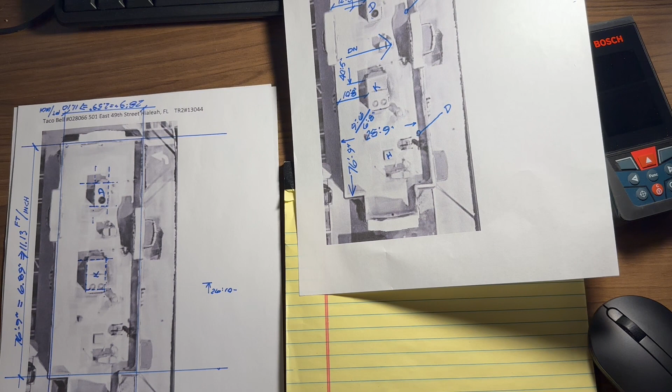Okay, now we're going to continue with the framing plan and locate the trusses that are actually physically supporting both of our units, the kitchen and the dining. You can start with either one. On this job, we started with the kitchen unit, and I'll walk you through the exact procedure we did. I have some field notes on the side, so I'm basically going to reproduce those and talk you through how we actually did it. So I'm going to start with the kitchen unit.

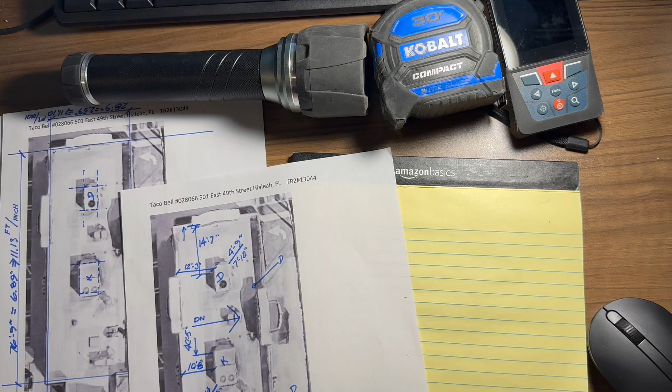I am now inside the kitchen, looking around, trying to figure out where to place my ladder, because I'm going to have to get up on the ladder, open the ceiling, poke through with a flashlight, tape measure, laser, and a pad of paper, and start observing, measuring, and taking notes.

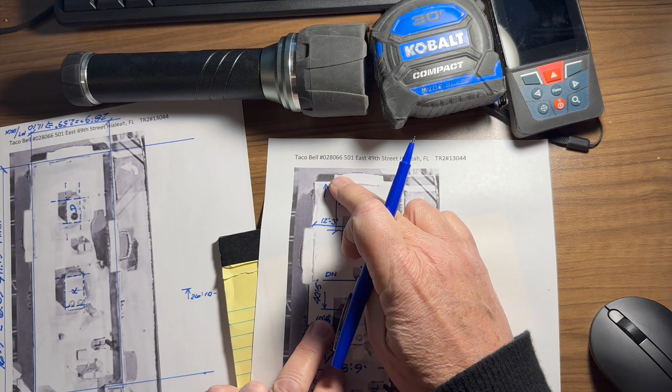Before I poke through the tile, I want to figure out where's a good place to do that. So I want to find the dimension, the location of the edge of this unit from the rear wall. I already did the math here: I took 76'9", the overall building, minus 40'5", minus 9'6", and I came up with 26'10". I made a side note here so I didn't forget it as I'm proceeding.

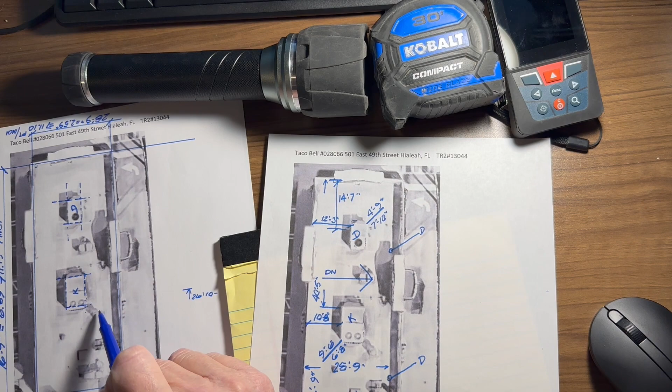So I move my ladder around that area and try to figure out where to place it so I can go up and pop through the tile. I go up and pop through the tile and see what I can see. Sometimes I can't see anything, so I need to move the ladder and find a place where I can see. Finally I get up there, and one of the first things I see is a set of double trusses.

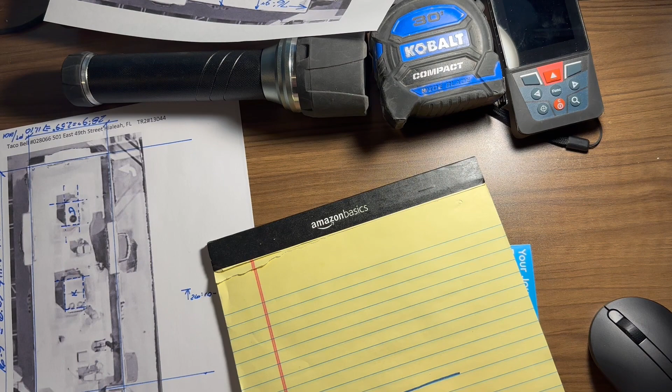I like it when I see double trusses because that carries a lot of weight. So the first thing I do is note a double truss. Then while I'm standing on top of the ladder with all my stuff spread out, I come down a couple steps, and I sketch here something which indicates what I call the rear wall.

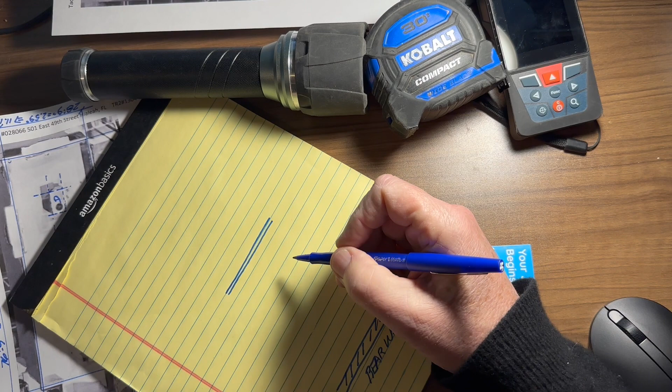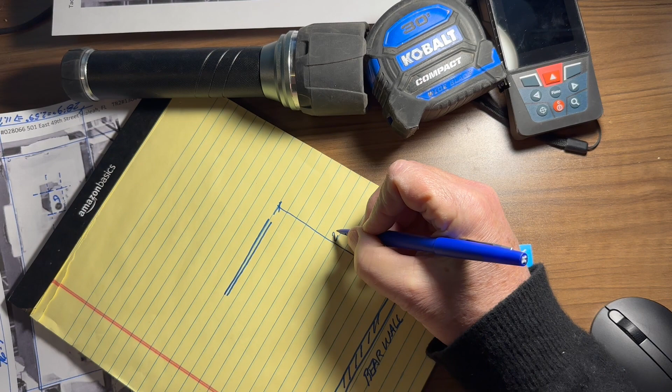While I'm standing a couple steps down, I hold my laser and shoot to the rear wall and make a note that that double truss is basically about 25 foot 4 inches from the rear wall. Now I've begun to figure it out. I'm going to set this stuff aside here.

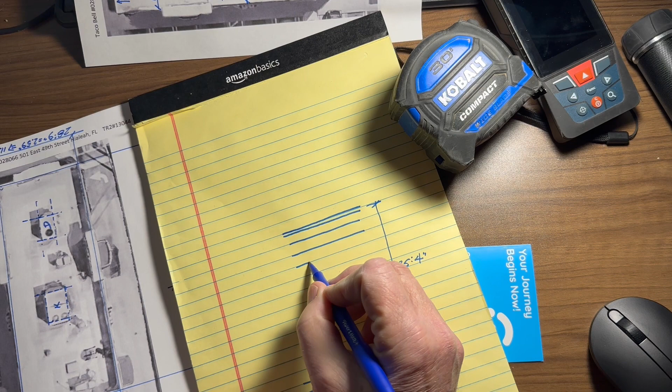Now, when I'm up here, I try to get all the information I can while I'm up here. So I look back towards the rear wall above the ceiling, and I can see a bunch of trusses this way. I measure with my tape measure the first truss, and I find there's one at 24 inches on center. Extend the tape, another at 24, another at 24, and I note 24 inches on center while I'm up on the ladder.

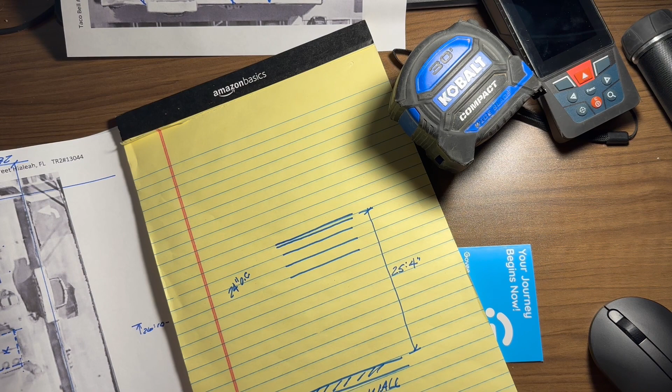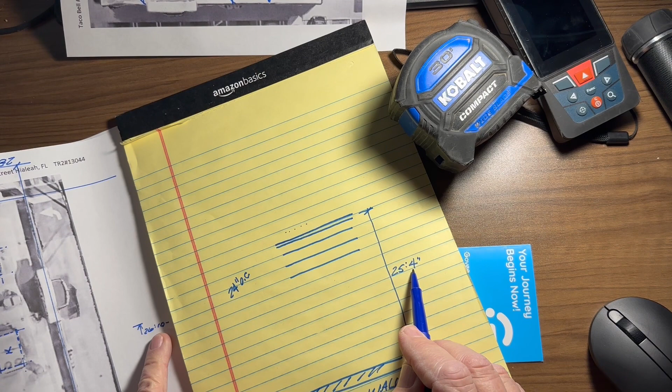Now I know that this is all on this edge of the unit because my unit starts at 26'10". Sometimes you will see down shots, but you're probably not going to see where the edge of that unit is. It's only by your scaled drawings and measured dimensions you're really going to know where the edge of that unit is, okay? So we know the edge of the unit starts somewhere over here at 26'10", and this is 25'4". The unit's going to extend basically 1'6" that way.

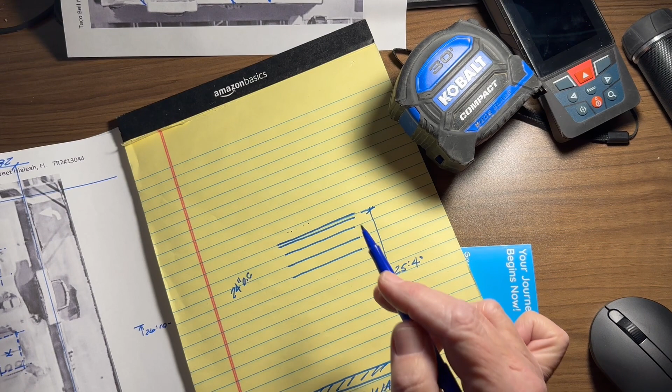So from 10 feet here, I need to know what the trusses are doing for another 10 or 12 or 14 feet this direction. In this particular case, I turned and looked this way, and it looked like there's a bunch of other trusses, similar spacing as these, so I just make a note of how many I can actually see. I don't make any assumptions, okay? I'm noting what I can see.

And I see a truss and a truss and a truss and a truss. And out here at this truss, it looks like another double truss. So I make a note of that, okay?

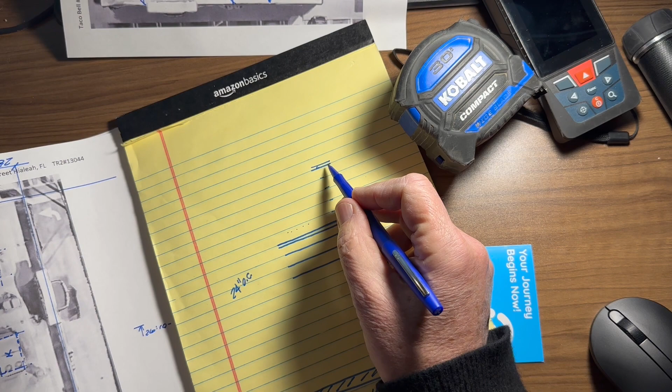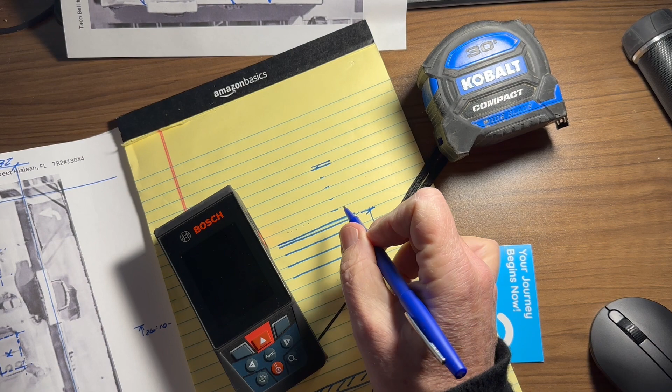Now I'm on my ladder here, I can't see perfectly well where that is. In this case, I remember I took the laser and placed the edge of it on this truss, and I had to wiggle it around, and I was able to shoot to this truss, and I came up with something like 123 inches.

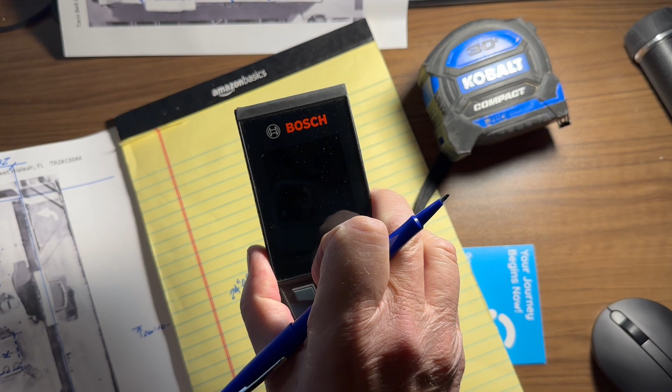Well, I know these are at 2 feet on center, so 2, 4, 6, 8, 10 - I'd expect that to be at 10 feet or 120 inches. I shot it, it was 123, but also my laser was at a cockeyed angle, okay? So I know it was really a little bit less than 123. I'm comfortable it was at 120, so I note it as 120.

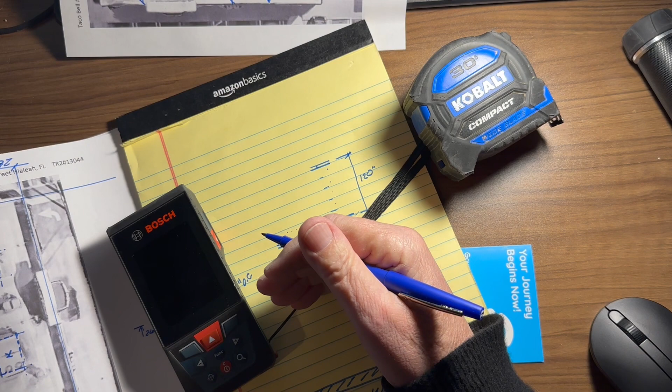Now, one other little notation there: almost always you're going to find trusses spaced at either 12 inches, 16 inches, 24 inches, or 32 inches, or increments of that, because they're normally spaced to work with the standard length of the sheets of plywood that lay on top, which is 96 inches, 8 feet, 96 inches.

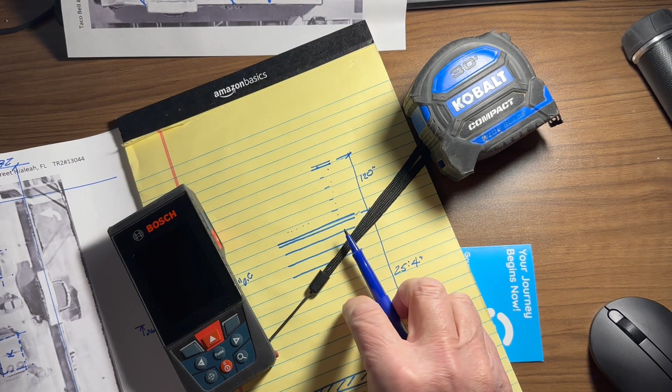So 120 is what I would expect, 5 spaces at 24 inches each. Now, I measured the 120, so I wrote the 120. I observe that these are spaces between and they all look the same, so I'm comfortable indicating them.

While I'm here, I notice there's a down shot between these two trusses, so I indicate it, and another one here between those two trusses, so I indicate it. If I can see where it is, I'll note it. If I can't, I won't. I showed supply return—I couldn't tell which was which, but one was one and the other was the other.

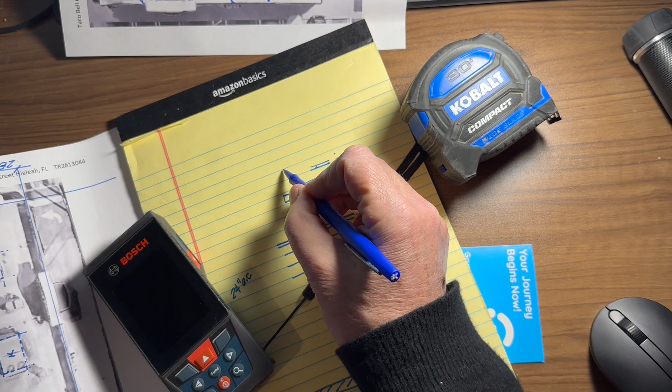Now I still need to get the trusses beyond here, okay? So in this case I had to take my ladder down and go back up here, and I went up here, basically here, and I was able to see 2 more trusses this way, both at 24 inches on center.

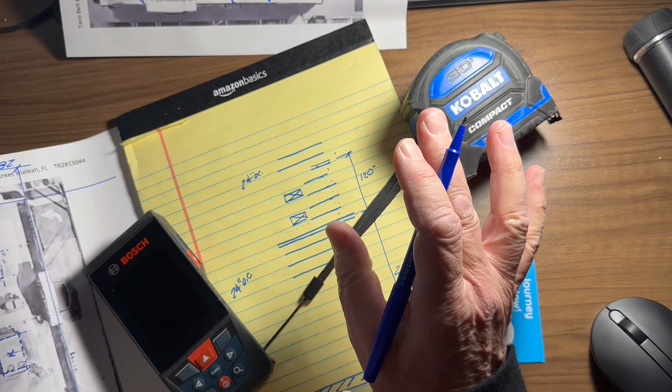And I was able to double check and verify going back this direction. I actually measured my 120 again and just made sure that my little assumption there was accurate. And I saw the trusses and I said, I'm good. So I climbed down off the ladder and went back to my table.

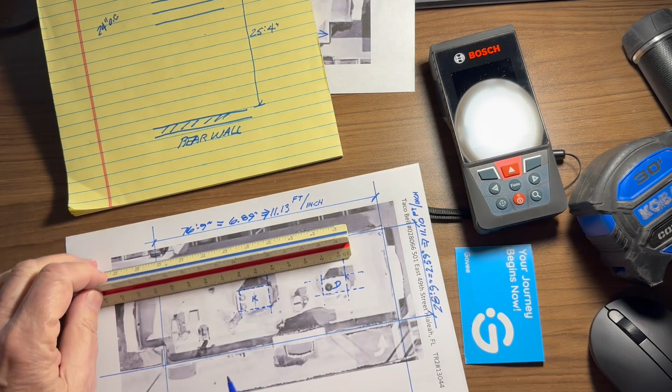Okay, now here at the table we're going to use the scale once again. And here's how we're going to do that. I'm going to use the scale, and I'm now going to draw these trusses to scale on this drawing. First thing I'm going to do is start with my 25'4" and turn the calculator on.

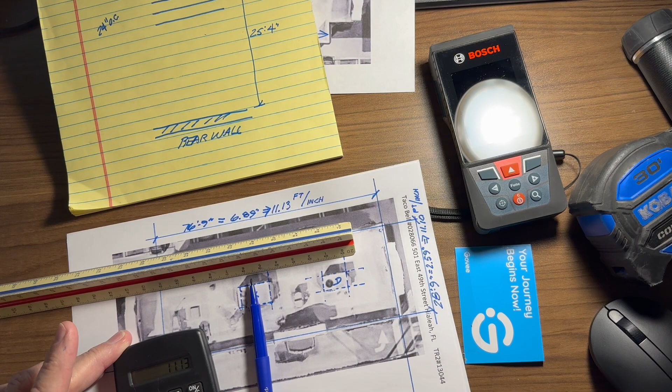25.33 divided by my scale of 11.13 equals 2.27 and something. So I'm going to come here at 2.27, right about there, and I'm going to draw a double truss.

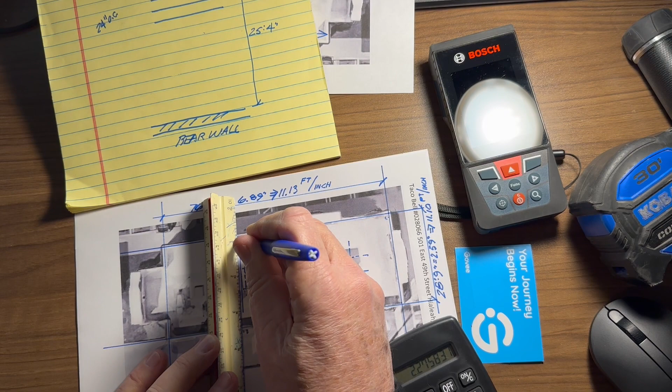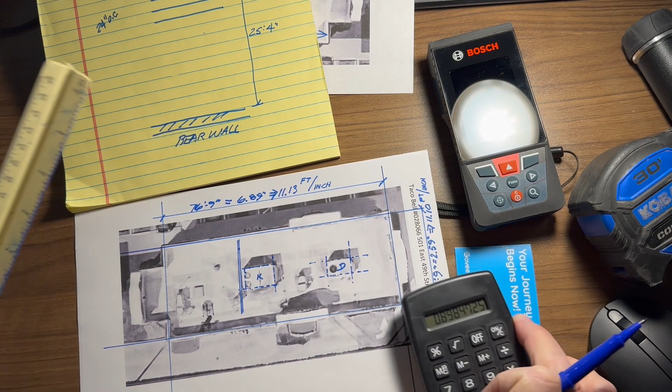Next what I'm going to do is come out here. I could go the very next one, but when you're working with these scales, the longer you can go, the more accurate it stays. I'm going to come out here 10 feet, 10 divided by 11.13 equals 0.898, or 0.9. So I'm going to come out here another 0.9 and indicate another double truss.

Okay, it's looking pretty good. I can see that these doubles are aligning with the kitchen truss, so I'm thinking I've got this thing figured out properly.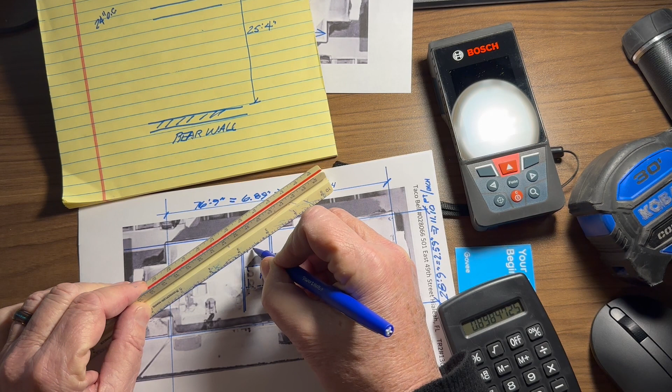So watch this. I'm going to go a tick there, and a tick at the 4, and a tick at the 6, and a tick at the 8. What I'm going to do is get actually kind of tricky, and I'm going to come this way also, because I want to show 1, 2, 3, and then I can go 2 that way also. So I'm going to go 1, 2.

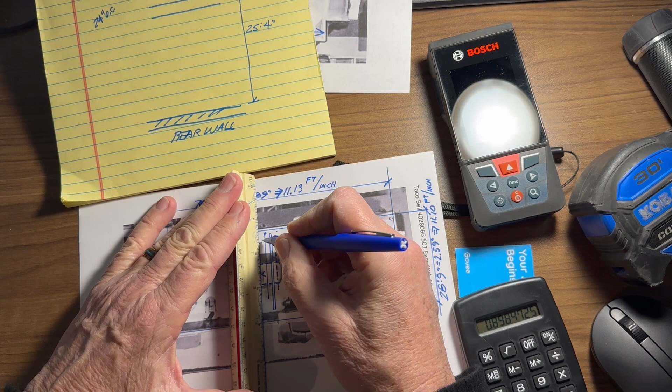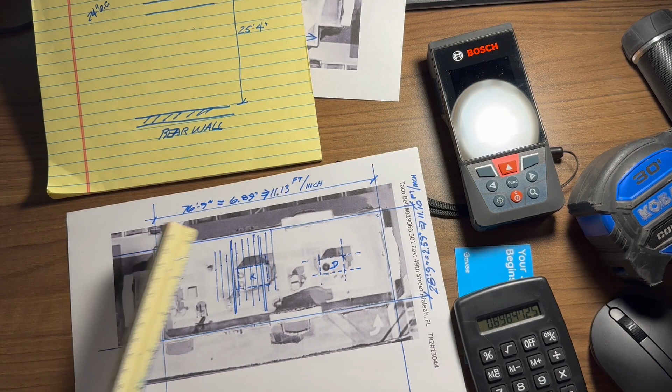Now what happens here is I draw a line on that tick, on that tick, on that tick, on that tick. I have now shown 4 trusses between the doubles, everything at equal spacing. And I'm going to add a line there, line there, line there, line there, line there. I have now shown all the trusses.

The spacing is to scale. The doubles are properly located. And I've shown all the trusses I have physically observed. Everything is to scale and organized on this drawing.

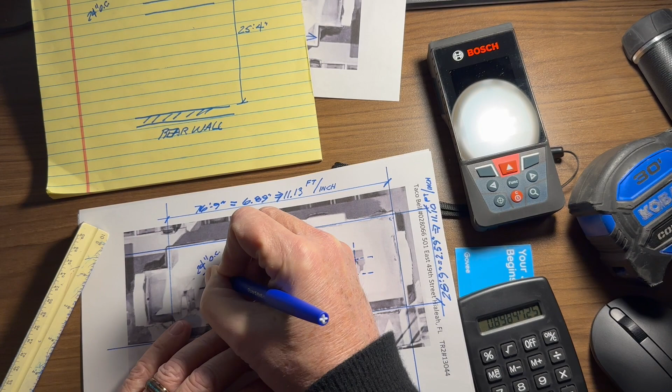Last thing I'm going to do is document on here what I actually physically measured. So I'm going to say 24 inches on center typical. I'm also going to note that there I measured 25 foot 4 inches, and there I measured 10 foot.

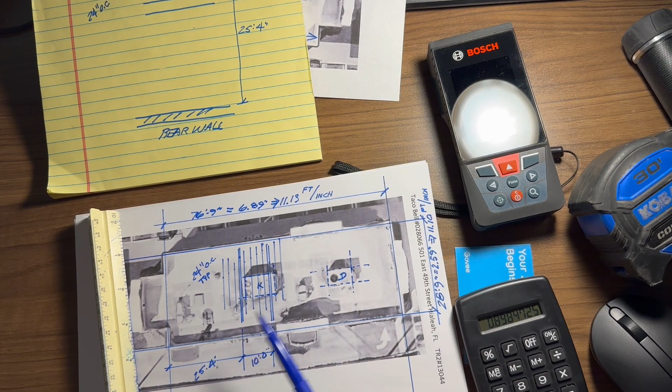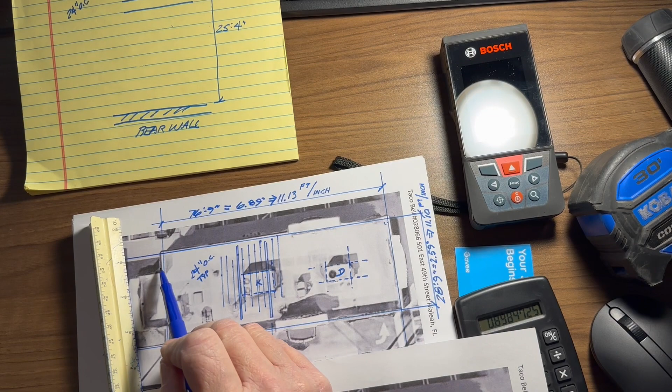Now that gives us, by documenting that, a little bit of room for the engineers to move. What we haven't documented is this: on the rooftop, that inside wall at the back of the store there—let me show that—that wall may be something like 8 inches thick. But here on the ground floor, it may be something like 12 inches thick. So by measuring here and there, etc., things can be off a couple inches. By giving these dimensions, our engineers are going to be able to do some research and figure out what is more appropriate here.

Okay, so now I've done trusses past the edge of the unit. This allows for what we call the tributary area—there's another handout that discusses that. But what we're always looking for is the trusses right up to the edge of the unit plus the truss beyond, same thing both directions.

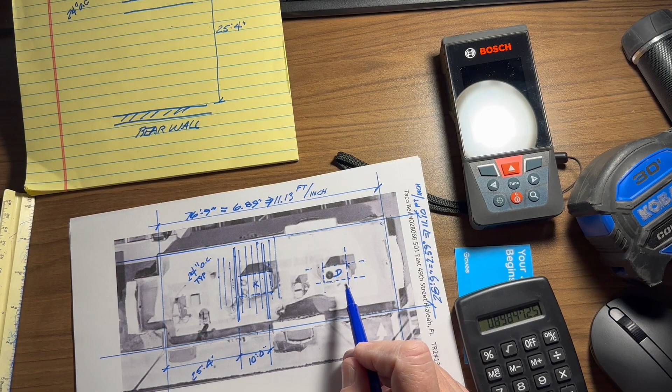The truss is right up to the edge of the unit plus the truss beyond. Because, for example, this double truss here is carrying not only the unit, but it's also carrying half of the weight of the spacing to the next truss. Okay, so that's that. I'm going to reproduce the same thing for the dining unit, and then we'll go to the next stage and get the truss profile.